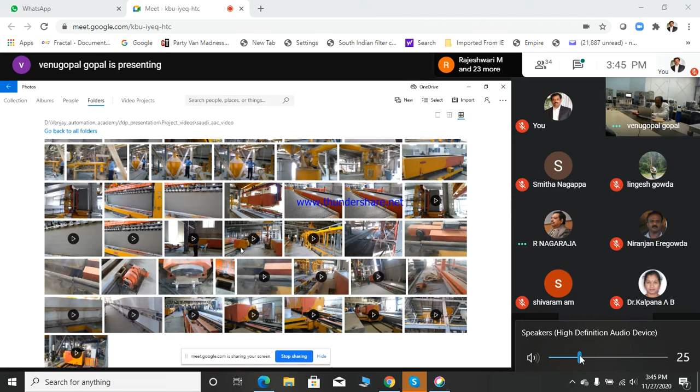I'm not going to bore you with any PPTs, I don't like to do that. Mine is a live demonstration. It's all real-time applications, so we don't deal with any theories. It's all practicals. So what do we produce?

This is a plant where we produce what we call AAC, aerated autoclave. These are all actually bricks used for building. Only in our country do we use cement blocks for all our buildings, whereas throughout the world, people use only this type of block.

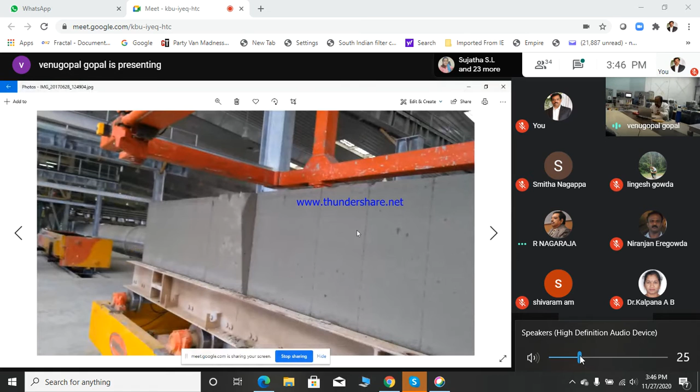This is called AAC. What does AAC mean? Aerated autoclave. Here we use fly ash. After burning the coal in the power plant, a huge amount of ash is left, that is called fly ash. We utilize this fly ash and make a brick for construction of buildings.

This is one area, over the last 4 or 5 years, where we have done a lot of work. I'll take about 5-10 minutes to go through this, and what consultancy means in this will become very clear, that's the reason I'm saying this.

So what we do, this is again SCADA. I showed you one SCADA system, this is SCADA for that particular plant, for the Saudi Arabian plant. I will try to reduce the volume because there is some noise coming through.

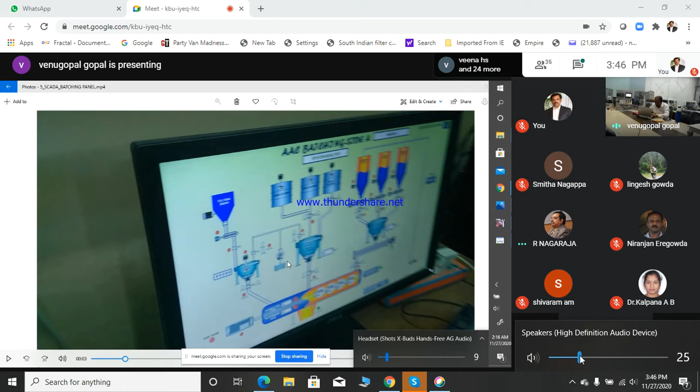We mix them into a slurry. This is a tank in which the slurry is stored. Now these are all powder, cement, silo, gypsum.

There is what is called a screw conveyor. I think if there are mechanical faculty here, they will probably connect with this. What is a screw conveyor? A screw is a conveyor which looks like a screw, but it's best for conveying powder. When you turn the screw, the powder slowly falls, so you get very fine control of the powder. This is called a screw conveyor.

These are all pumps for liquid use. This is a weigh hopper, showing the weight of the liquid. So we measure the liquid, we measure the powder, then we measure the aluminium, and mix all of them in a mixer. This is how this plant produces that slurry.

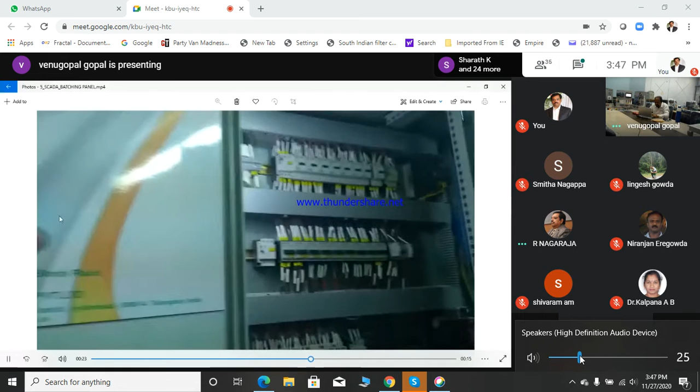This is the panel, these are all our equipment supplied by us. All this is manufactured in our factory, we manufacture these types of panels. These are our customers who are machine builders. So we produce all this in our factory and export it to Saudi Arabia and different parts of the world.

So what exactly do we do? See, this is the tank, it's such a huge tank, with all this slurry pumped, and all these are pumping.

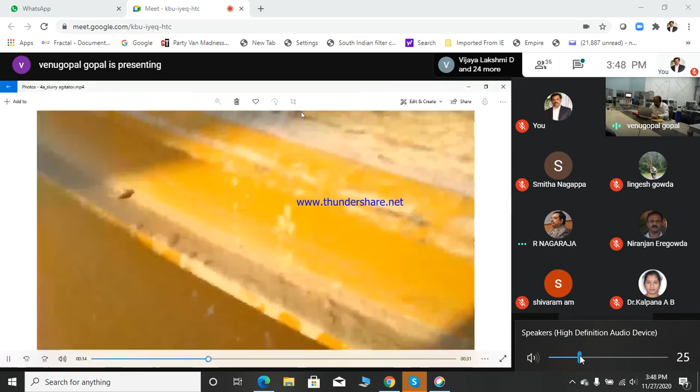This is a place called Jubail, in Saudi Arabia. It's one of the very big industrial cities in Saudi Arabia, almost 100 kilometers long. Can you believe 100 kilometers? You will see only industry.

So we make a slurry out of this, then we add them, it's like this. Now I will explain the process a little bit, because this is a very long process. But what is required first is process knowledge.

Be successful in becoming a consultant. That's why I'm saying we are only an automation supplier, but however, we are involved right from the beginning. Once I finish this, I'll come back to the consultancy portion.

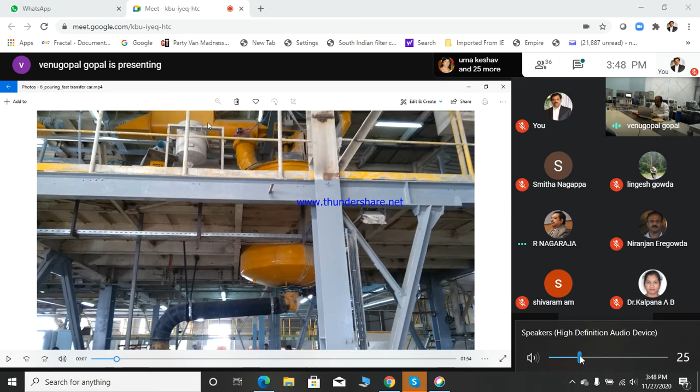We have a screw conveyor here, that's what you saw on the SCADA, this is the actual screw. Powder comes from this circuit, liquid comes from this circuit, they all get mixed in a mixer. This is a mold, because we have to cast the liquid into a mold.

So what do you see here? There is a controller in this, these are all intelligent controllers. There's a controller inside this box, and one more controller on top, and they talk to each other wirelessly. There is no wire connectivity because this is a moving car.

Once we pour all the liquid, it starts moving. We can't put wire to this, mainly because it's very dirty, this is a very strong bonding cement, so it will damage all your wires.

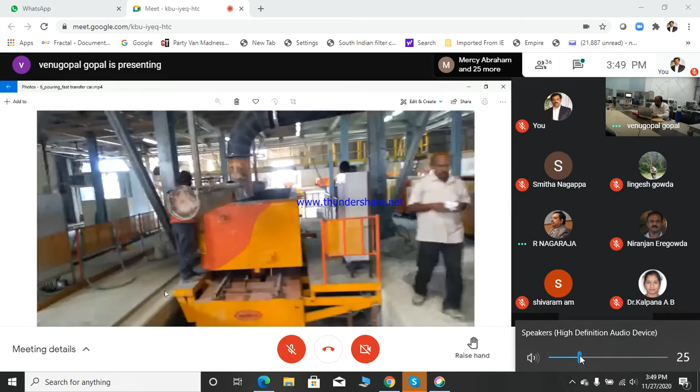How does it get power? There is power inside this. Inside this area, there is what is called a bus bar, a shrouded bus bar. So it gets power from inside, but all controls are wireless.

So this mold, once poured, has to be left for 2 hours, undisturbed, because that is where the chemical reaction should take place inside, there is what is called a bubbling activity that should happen inside. So now what is happening? This car, this mold, by the way, ours is a fully mechanized system.

Okay, so whatever automation we do is totally mechanized. So whatever people you saw on the car, they are basically, these two people are fitters.

What we are doing, when this car moves, there should not be any vibration. If it vibrates, then this chemical reaction will collapse. So these fellows are grinders. They just grinded this rail, and now they are taking a ride to see how much vibration there is. Based on that, they grind it again. Otherwise, all this moves automatically by itself.

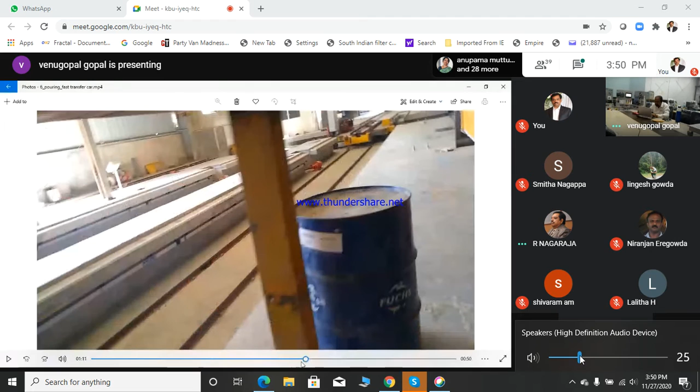So now what will happen? This mold will be transferred onto one more car which is waiting on this side. See, there is one more car waiting here. So this mold comes here and gets transferred onto this car. So what will happen to that mold? This car, again, is a very intelligent car.

Intelligence is built in everywhere. This is called distributed control. The control is not at one centralized place. This car has got its own intelligence, everybody is free to work, but they talk to each other on a wireless system. That's the beauty of this entire plant. You don't see much cables anywhere because they're all on wireless.

So whatever mold this fellow received, he has pushed all here. See, you can see all these molds were pushed one after the other. They pushed here, 1, 2, 3, like that. It has pushed on its own.

Now, after a certain time, based on the temperature and several other factors, this fellow will decide the mold is ready. It is hard now. Whatever liquid was there, it is now set. So now he is pulling this and going to put it into another track.

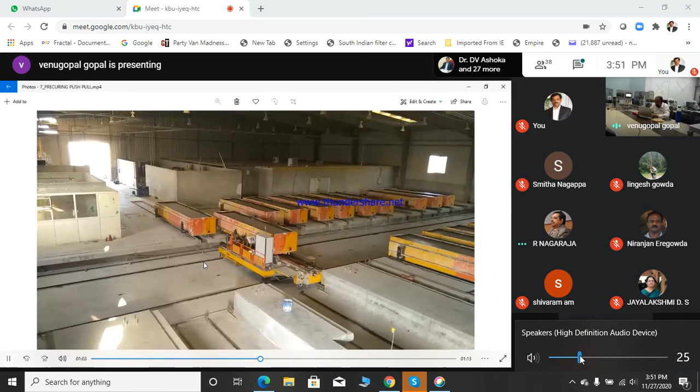Now, the first effort of automation here is, imagine if somebody comes into this line and this car moves at great speed, you will get crushed. So safety becomes the topmost priority. One of the main reasons why you should have thorough process knowledge is because in automation, safety becomes the topmost priority.

So now after this mold is pushed, this will come and push this mold onto this track. I'm going to accelerate a little bit because we hardly have 30-40 minutes to talk, so I'll try to push things a little faster. If there is anything, one more is coming now. By the time you push this, one more will be coming.

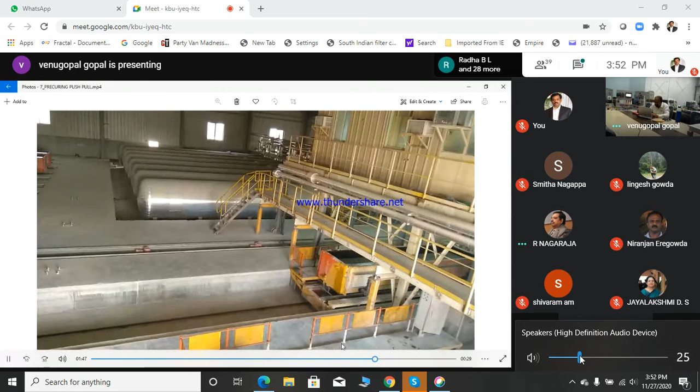This is a steam curing chamber. Whatever you see here is the steam curing chamber. So the whole thing is sequenced that way. No time is wasted. By the time you push one mold, the second mold is ready. That is how automation improves productivity.

Now what is the biggest challenge for us? This whole thing is 8 tons. The weight of this whole thing is 8 tons. 8 tons of material has to come and park here with an accuracy of 100 microns. Imagine, if it comes and crashes onto the wall, what is here is just a wall. So if your control becomes out of control, there is a serious accident. Look at this, it comes so close, it doesn't hit.

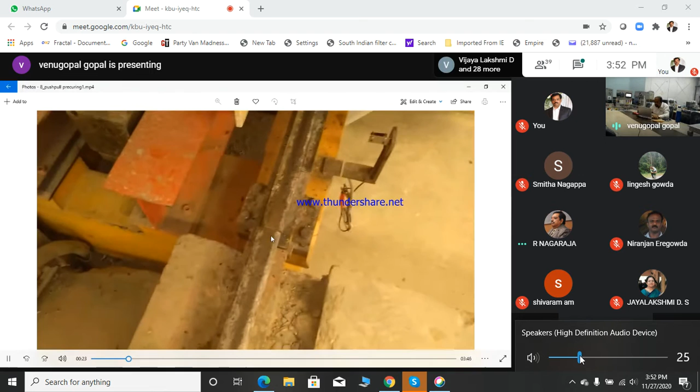Now look at this area, parking accuracy, 100 microns. Look at the parking, so accurate it has to be, because otherwise the mold will not get transferred from this rail to that rail. If it doesn't get transferred, and it falls down, finish. Next 3 days, your production is dead, because you have to cut the rails and do so many things.

Accident means very severe. And imagine one more thing: suppose you write a wrong program in your controller, and when this fellow is halfway, after pushing the mold, it has to return back to push the next mold. Suppose at this stage, if this fellow takes off, what will happen? The mold is half out, half inside. Then you have a serious problem. So these are all what we call interlocks.

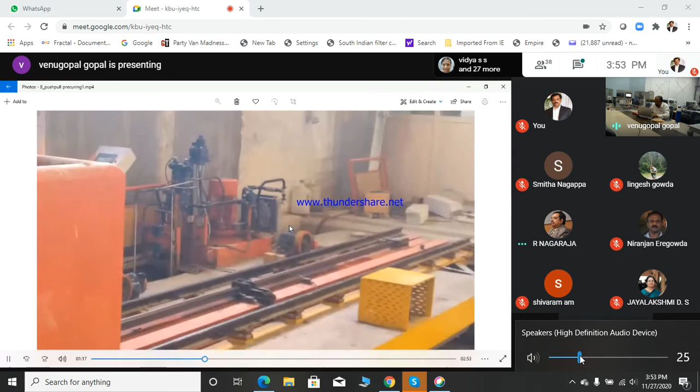Very, very essential when we write the program. Okay, and what you see here on the back side is hydraulics. See, one of the great advantages: I am an electrical engineer basically, but I gave a talk at NIT Calicut on hydraulics for 3 days. Though I am not a mechanical engineer, we know about hydraulics applications, how to size a pump, how to size the cylinders. All these pushers are hydraulic power packs.

This is a hydraulic power pack which is actually pushing this mold inside. So once this is completely out, this will take off. That means we guide it by another sensor. See, now this knows comfortably that it is out. That means there is one more sensor here, somewhere here. If that sensor is on, that means the mold is comfortably outside. So all these interlocks are very, very essential.

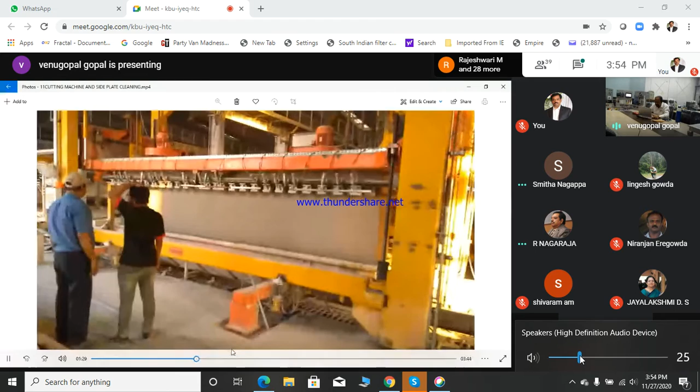See, this we are cutting by wire. Okay, then we tilt it. A lot of processes will happen on this. Let us not go through it completely, because this video itself will take at least 1 hour to understand every process. So many types of cranes are there, so many types of cars are there. All are continuously working one after the other without any accident for the last 2 years, producing 1,600 cubic meters. It's a huge plant actually.

Okay, see, top base cutting. Now this is waiting because this crane has to come this side. Unless this crane comes this side, this cannot go further. So as soon as this comes back, this will go for further parts. Like this, different types of interlocks. Then what will happen after you cut this cake? It gets bonded. This is another very tricky process.

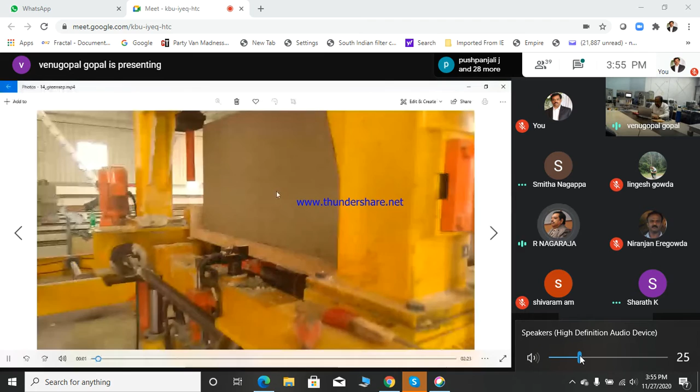Now these are all things after cutting by a wire, because this is a very heavy wet cake. It is really wet. If you just press it, it will break. At this stage, it is very heavy. It will bond itself, that means the pieces get attached to one another, and then removal becomes difficult. So we do another process called green separation, where we separate each block separately at the green stage itself. I'll show you here. You can come here.

See here. This is all using servo drives, hydraulics, pneumatics. See, now this is separated. We separate each block. Now it is very wet actually. If you touch it, it will break. But we have to handle it so smoothly. We use servo drives, ball screws, all these mechanisms, because we want to reduce the impulse torque.

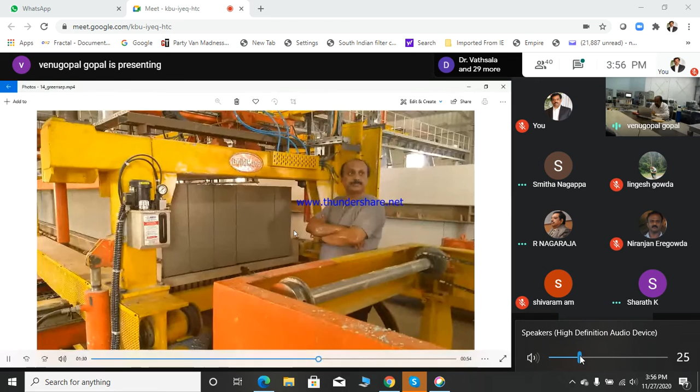So how will a ball screw reduce impulse torque? This is a subject of mechanical engineering. But automation fellows should know, because if you go for some vibrating system like hydraulics, it will generate more vibration. It may not be as smooth as a ball screw. So which system to use where is very important knowledge that a consultant should have.

Okay, so now see, this is already bonded. Now I am separating this. Automatically we are separating this. So this is a very tricky machine actually. Initially we broke so many blocks. After 2-3 days of trial, we could finally succeed in separating the blocks at the green stage.

Because after steam curing, it becomes very hard. You can't touch it, it will be so hard. This is a steam cured block. This is a green block. This is green, this is already dry. So like this, there will be so many processes in this tilting, with a hydraulic tilting table and all that. Let me not go through every detail of this. Just for sake of it, see now, to park this.

Why am I telling you we have to work like a consultant? This parking, how we got this order: we quoted against a multinational company like Siemens, a very big company. Against them, our company, Venja Automation, is unknown. Nobody knows it. It is a very small company. Now, what happened? Before this order was being discussed, we approached the customer. The customer was not willing. He said, no, I deal only with very big companies.

They don't go to small companies like Venja Automation; we are a very small company. So it was almost a cakewalk order for Siemens. He had already decided to give this order to Siemens. Because previously about 5 crores worth of orders had been given to Siemens, and when the first plant was getting installed, they failed in this application.

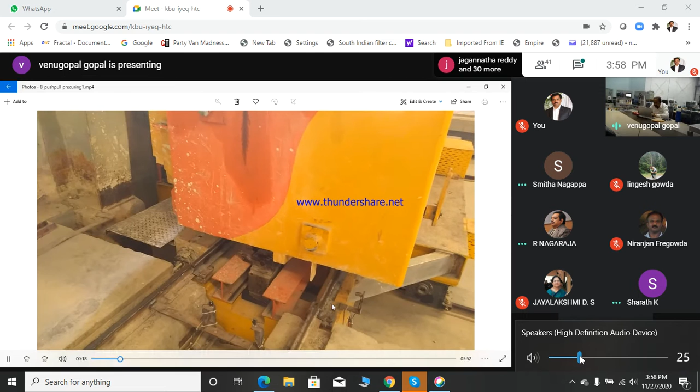Siemens literally failed. Some young engineer went, he had no experience. So they failed in this application because they were unable to do this proper alignment. Sometimes it stops here, sometimes it stops there. Why did they fail? Because they used an encoder on this wheel. So whenever this wheel rotates, that encoder will make a number of pulses.

Okay, I use a lot of these systems for training and teaching students. So see, I have this encoder with me. We call this an encoder, whatever I am having in my hand. We use plenty of encoders. That means once you want to know the encoder, again instrumentation comes into the picture. So you should have knowledge of instrumentation, electrical engineering, electronics, because of that acceleration, deceleration, that slow control. Again, you need knowledge of drives and motors. So you need multidisciplinary knowledge to be a consultant.

Anyway, let me finish that story. So this encoder they had used. Now what is the drawback? The encoder is an excellent device, there is no doubt. But there is a drawback. What will happen if you put an encoder on the wheel? Now this is a mechanical device. When the wheel rotates, the car will not move exactly pi times d of the wheel. If the wheel diameter is 300 mm, we expect one rotation to be pi times d. That means this car should have moved about 900 mm.

But sometimes it will move by 890, sometimes by 910, sometimes by 850. That is because there is a slip, a metal slipping. So due to that your encoder becomes erroneous. So if you try to use such a product, you fail miserably. So then this customer said, what will you do? Will you go for this? Will you go for that? And I said, if you are going for an encoder, then you will miserably fail.

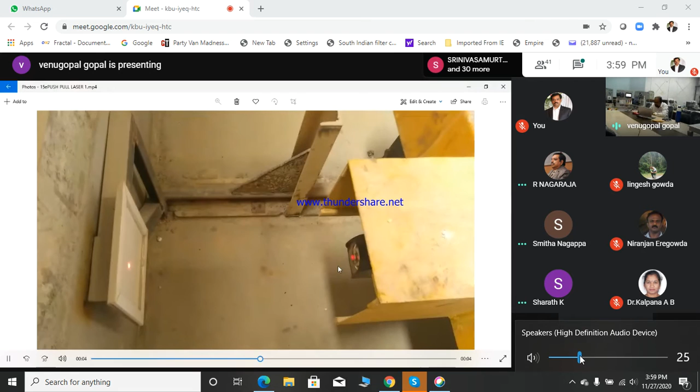And then what is the next solution? Then I gave him a solution. We have to go for an external encoder. See, this is a sensor, we use a laser. This laser sensor is fitted to the car. Now this will put a beam on the wall. Now when this moves, the laser beam will elongate. Now this has no slip because there is no metal to metal slip, because this is directly giving me the distance between this wall and this car. I'm getting direct distance in 32-bit format.

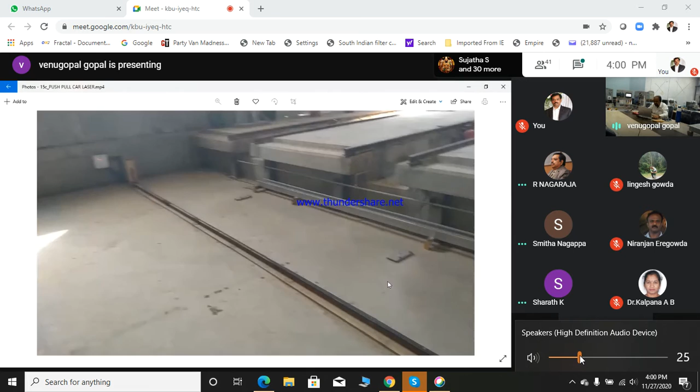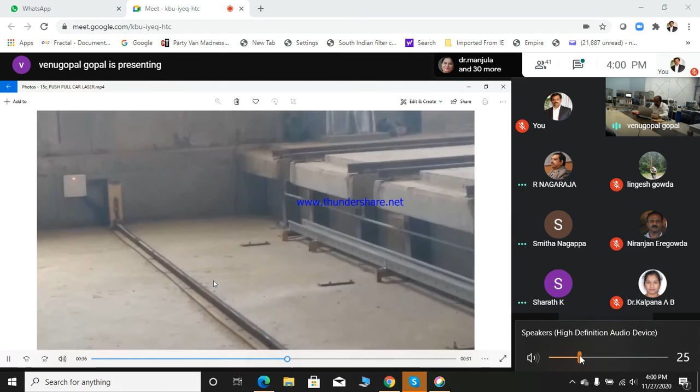What is 32-bit format? Again, electronics engineering comes into the picture. You must understand binary language for electronics engineering. 32-bit is a huge number. This entire length is 55 meters, and I get a number worth some 55 crore. That means every meter becomes 1 crore. That means my accuracy will be better than 1 micron. 1 micron is only a thousandth of a mm. So once I get a sensor which gives me exact distance, then I write a program: you slow down, you stop, all this. Now this is exactly the knowledge of consulting.

So this is how I got the order. The moment I described to them that if you use an encoder you are going to fail miserably, he said, yes, I'm very glad that before using the encoder, you told me such a thing is not going to work, because we were fools, we gave 4 orders to them and all 4 orders are in trouble now. So can you please help us? Then we got this order. It is a longer story than this. Let us stop at this stage.

Because for the automation to be successful, we should have a shorter path. You cannot have your mold move all around the globe and then come here. By the time it comes here, we would have lost so much time. Because we have to produce 1200 cubic meters. 1200 cubic meters means every 4 minutes we have to catch one mold. If I have to take one mold every 4 minutes, the path has to be shorter. If you make that mold move all the way, you lose time. Then your automation will not be successful, and whatever crores of rupees you invest becomes waste.

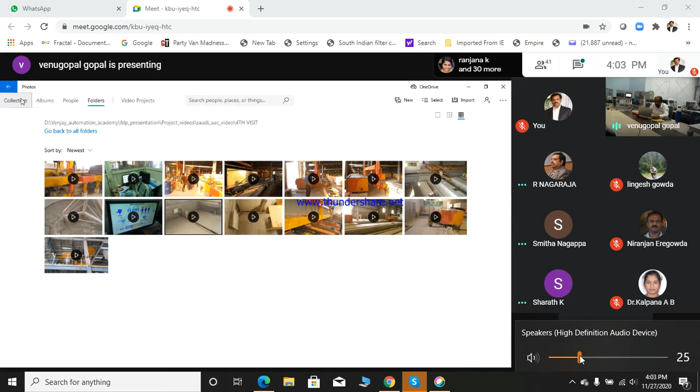Now, instead of block making, we also do one more type of project. Here again I am a consultant, supplier, everything. Consultant free of charge, because they expect us to do every consultancy free, because they are giving us the order. But for me also it's good, because I am assured of the order, because nobody knows the client better than me. So instead of believing somebody who doesn't know, the customer will be more happy to give me the order, because I am involved right from the beginning.

What is this? This is a different type of plant. Here we built 1,100 houses in 8 months. Can you believe? In 8 months we built 1,100, in 7 towers. How do we do it? If you take block by block and try to construct this wall, it will take ages. Like your college buildings, they are all built with those blocks. It would have taken 4-5 years to construct a building like this. What do we do? We make the wall itself in the factory. Every 15 minutes we cast one wall.

Okay. So how does it work? This is again another different thing. I will not spend much time, but I'll just give a brief idea. What you see here in blue color is the plotter. After you make the drawing of the building, we allot a number to each wall. For example, you take this wall. This is wall number 1. This is wall number 2.

What is the difference between this wall and this wall? Here there is one window. Here there is one big door, a balcony door. This side wall has nothing. It's a straight plain wall with no window, nothing. Like that, different walls are given numbers. There are 11 floors in this building, and there are 7 towers. So 77 walls will be made, not at the same time. So based on the height of the wall, this is a moving circulation system.

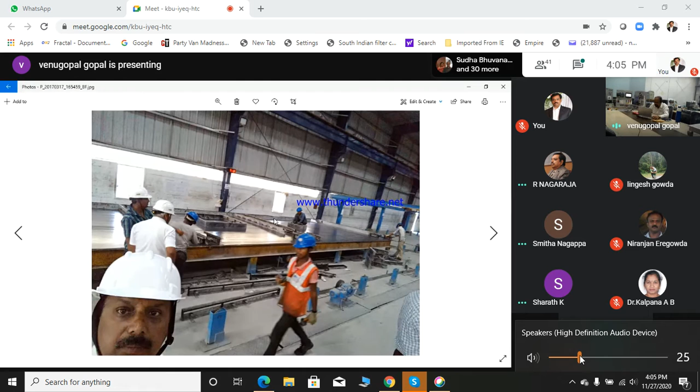This metal that you are seeing moves from here to here. It's on rollers. You can see here, they're all on rollers. So it moves from there to here. Now this will plot what is the size of the wall. Suppose I want a 10 feet wall, it will only plot 10 feet. Suppose I want a 15 feet wall, it will plot 15 feet.

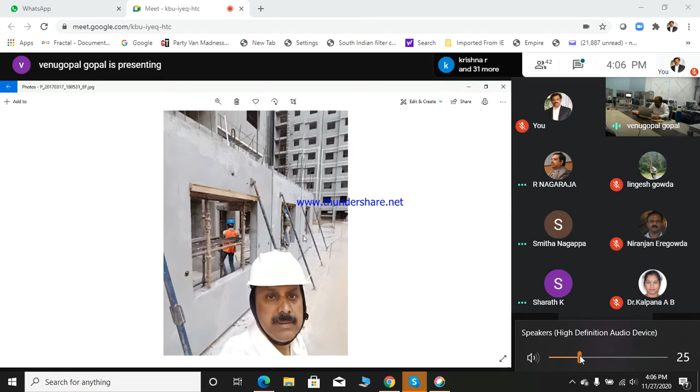And what is this opening? There are windows, doors, all those openings have been filled up. Then what we do? We do what is called cage making. So these steel bars are inserted, then all these electrical pipelines, plumbing pipelines, they're all drawn before itself. See, one great thing is all are done in the factory itself. This plumbing line, everything done in the factory. This is a factory, so nothing is done on the site.

So after all these lines are put, this crane will come, one more crane which is on the other side will come and pour the concrete. After pouring the concrete, we vibrate it. Look at the finish of this wall, fully finished. That means no plastering required. Just right away, you can paint this wall. It is brought to that shape. Imagine all this happens in 15 minutes. Every 15 minutes we produce one wall.

Then this crane, where is it? Okay, this crane, this is a very big crane. See, this is a big challenge. Lifting so many tons of material up, then pushing it into the curing chamber. So that wall will be cured for about 8 hours in steam. So every 15 minutes you put one in and you take out one. That's how you get one wall every 15 minutes.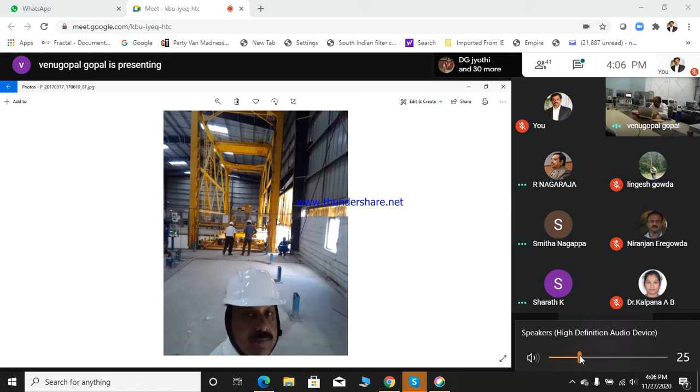Then these walls are transported by lorry to the site wherever they are getting erected. It is mounted on the lorry by a gantry crane. This is a gantry crane which lifts this and puts it. Then it is erected by a tower crane. You would have seen tower cranes on top of many buildings. This tower crane will simply lift that wall and place it here. Then they put a sealant, gum. Very simple. So in about 8 months, your building is completely ready. Look at this. This is a tower crane lifting a wall and just placing it.

So these are very new construction methods. We also do a lot of work in this field. Anyway, I will not spend much time on this, because I am trying to show you only construction type of automation. We also do automation. This is another very big field. Just now Madam was mentioning, Pulau Ubin is an island. So we have done a lot of work on this island in Singapore.

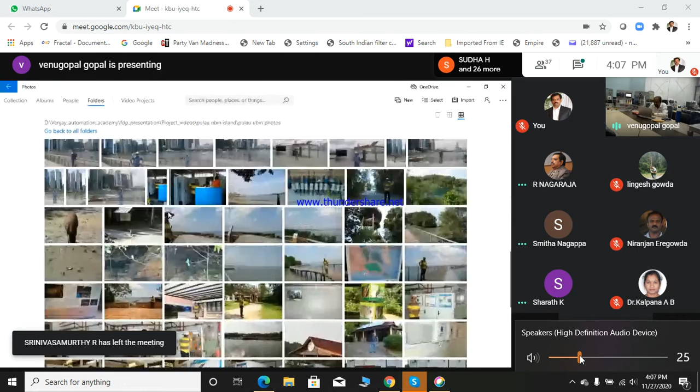Basically, this is a hybrid generator. Here we use diesel engine, wind and solar. Of course, wind is not there now because a lot of birds migrate to this island. They don't want any bird to die because of the wind blades. So only these two are there. What exactly is this project? Another type of automation, which needs a very thorough knowledge of electrical engineering. This is called a doubly-fed induction generator.

What exactly do we do? This diesel engine runs at different speeds to save diesel. This island is a tourist island. A lot of people come to this island. So this is actually our generating station. On the top we have put the solar panels. Now in the morning, sunshine is very bright. At that time, a lot of energy is generated, but no taker, because nobody has come to the island yet. We have to come by ship, ferry and all that. It will take time to come to the island.

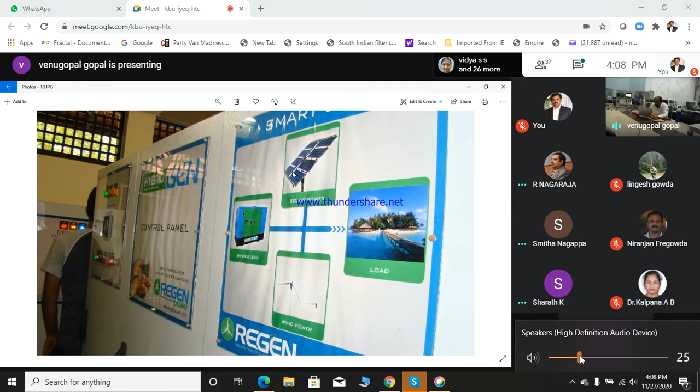So at 9 o'clock, there is bright sunshine. Nobody is there. Then what will our system do? Our system will pump the water, then start the ice making. All that energy utilization we do from this panel. Then we generate 3.2 megawatts. Can you believe we generate 3.2 megawatts?

In the afternoon, when all the people come to restaurants, air conditioners and so many heavy loads come on the system. At that time, we switch on the diesel engine and run it at different speeds. The diesel engine itself is specially made to run at different speeds, so that whatever is the shortfall from the renewable energy will be compensated by this diesel engine.

So previously, before installing this system, all the hotels had only generators. They had their own captive generators. Now they were all removed, and now we are giving power from our system, which has got all these PLC controls and all the things. So it's a very, very big project actually.

So many types of projects we do. We do foundry automation. I don't think I will have time to go through each one of them. We are already at 4:10. Here also a lot of knowledge is required to do a foundry automation. I'll just give you a simple example. See, while we were commissioning this foundry, how it works?

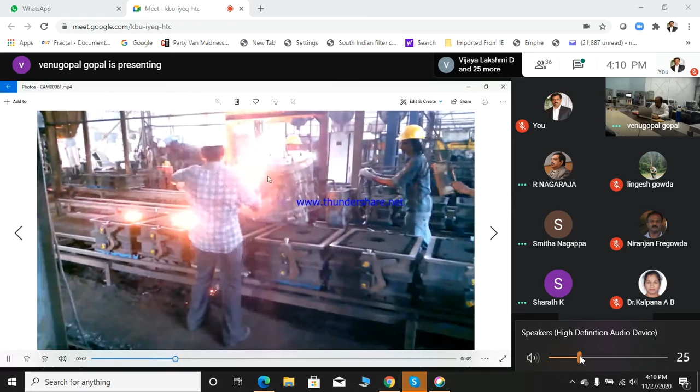Basically, you pour hot metal from a furnace, from an arc furnace. This is the arc furnace. You melt all this metal, all the scrap metal, some other metal. They are all added together in this arc furnace. Now from this ladle, the hot metal is tapped and it will be poured onto the mold. You can see here on this sand mold, a small hole is there. So you pour this hot metal, then you get whatever shape you want to get.

Now what exactly does this customer do? This plant is in Trichy. They produce balls, round balls for cement plants. In a cement plant, when you want to powder, even in the power plant, when you get coal, this coal will be lumps. Somebody has to powder it. Only then will it burn very well.

For powdering, 15 tons to 20 tons an hour of coal is required in a power plant. Who will sit and start powdering this? So this will be done by the ball mill. That ball mill needs steel balls, which, when you rotate the ball mill, will hammer and make a powder. So this company produces the steel balls. Look at how we have placed our panel, and what type of environment we work in. Anyway, that's a different story.

Now I want to show you a very interesting part of this. The sand plant is one area in a foundry where there will be many belt conveyors. A conveyor will carry the sand from 1 to 2 and so on. Then there will be a bucket elevator which will lift it vertically, then it falls into a silo. Like that, so many processes. One more bucket elevator, one more belt conveyor. These belt conveyors are underground, unattended.

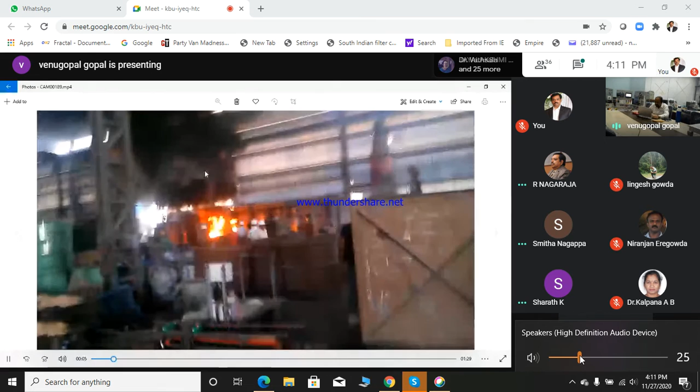Some things happen very easily. One day it caught fire. The belt conveyor caught fire. So how will a belt conveyor catch fire? What is the modality of that?

Just very recently we concluded a one-month internship for 190 students. I showed them all these things and explained what this batching plant is and all that. Anyway, let us come back to this. This is a belt conveyor. This is a batching plant with load cell, pneumatics. This is a pneumatic cylinder. We teach so many things. Knowledge of pneumatics, everything is required to be successful in automation.

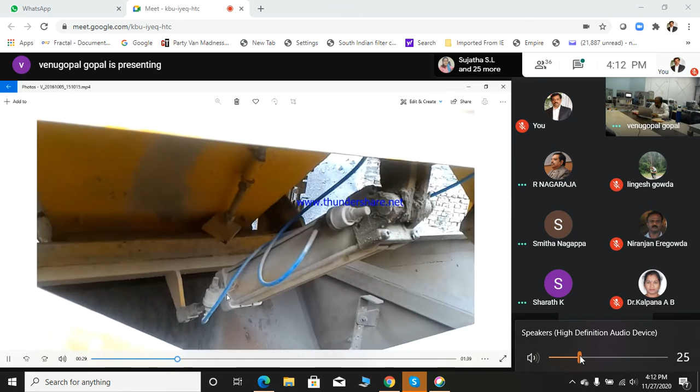Okay, now let us get back. This is a belt conveyor. This belt conveyor is hung by a load cell. In this plant, see, this is a load cell. If you see here, you can see an S-type load cell. So this gate will open and allow the material to fall until we achieve the weight. Once the weight is achieved, it will close automatically. How are you measuring the weight? You are measuring the weight by a load cell.

So see now, this is the S-type load cell. Can you see a belt here? Not small, but in a small place. This belt is hung by a load cell. The belt is actually hanging. If the material falls onto the belt, this will get a force. Based on that force, you will be measuring the weight.

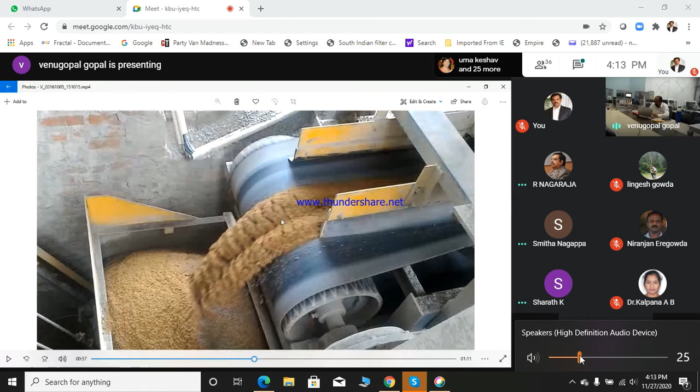Now, what happens? On this sand plant, this belt many times gets stuck. If the material becomes overloaded, suppose instead of small lumps of sand falling, the material will get choked. At that time, these rollers will be rotating, but the belt will be stuck, not moving. At that time, due to friction, it will catch fire. So what to do?

For these idle rollers, we put one sensor called a zero speed switch. Whenever the belt is rotating, that roller will be attached to the belt, pressed against it. As the belt moves, the roller also rotates. If the roller rotates, the pulse will come first, and one sensor will turn on and off continuously.

As long as we get that pulse on and off, that means the belt is physically moving, so we keep quiet. The moment we don't get that pulse, it means the belt is stuck. Immediately we stop this belt, and not only this belt but all the preceding belts. Suppose this is BC5, belt conveyor 5, then we have to stop 4, 3, 2, 1. All of them have to be stopped because this one is already choked, and you should not push further material.

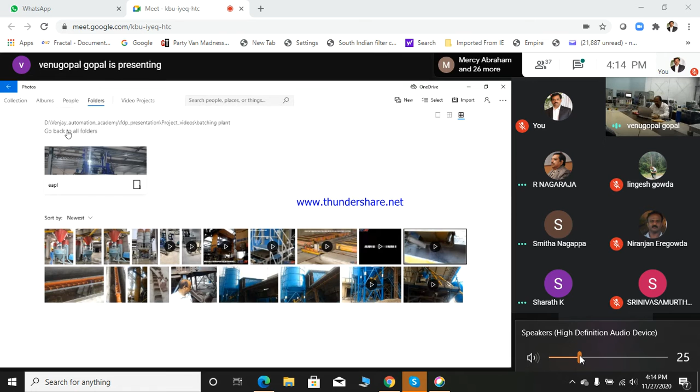So these are all different process knowledge required if you are working in foundry, if you are working in power plants. Lots of varieties of knowledge are required, so you cannot become a consultant in every field. I'll tell you what exactly the consultancies you can do as a college.

So anyway, now we try to impart a lot of this knowledge to students. These are all students who come to our factory, many times, lots of students. This is what we manufacture in our factory - these are all air circuit breaker panels. This one is for Kesoram Cement.

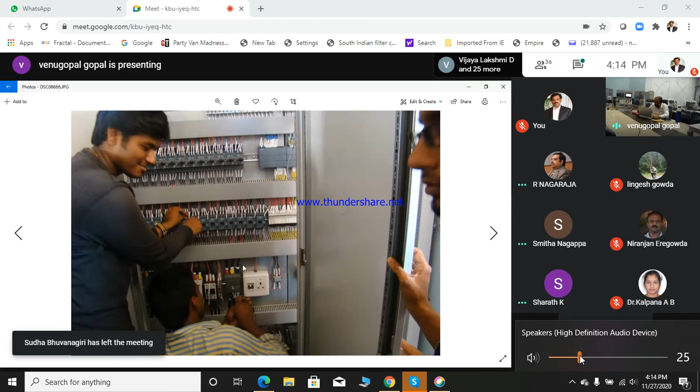Whenever they come, whatever is going on in the factory, we try to show them, we try to make them learn. This knowledge is required for them because they should come with system knowledge - knowledge of each of these components we use, like MPCB, motor protection circuit breakers. This is a PLC, these are MPCBs, contactors, a lot of these devices which we use for protection.

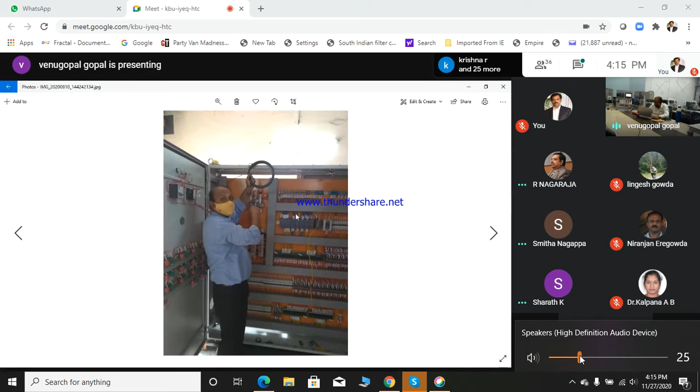Then electronics, instrumentation, computer science - I will come to computer science also.

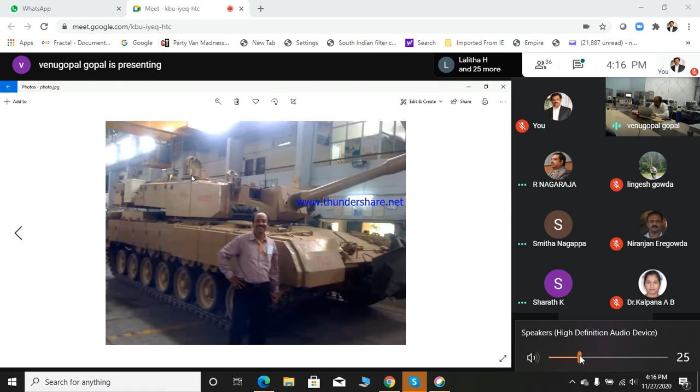We did some work for the Arjun battle tank. This is the main gun, and there will be one more gun called the auxiliary gun. One of the projects we did was for missiles - these are all the different missiles that are kept in the bin, and we have to find out which missile is in which bin.

After in warfare, what happens is they remove the missile and keep firing, so what is left in the bin will not be known to them. So we have to use a very special sensor to find out what it is. How do you identify missile 1 from missile 2? Only the tip - only from the tip can you identify it, because the backside all missiles look the same. Heights are different, bases are different, radiuses are different.

So we use a very special ultrasonic sensor because if you try to use a laser sensor or any other type of sensor, that may develop local heat. So I use this type of sensor - let me grab this here. This is the sensor which we use there. It uses sound waves, produces sound waves and gets a reflection. Based on that, we measure the diameter and the slope. For making the points, when this is pushed, we measure here, and here.

Now, between the two coordinates, we calculate delta x and delta y. We know what is y and what is x. Based on that, we calculate the radius. So whatever analytical geometry I learned long back, all that we can use.

That's one part, but a very big part which I will try to show you now is why a consultancy job is not easy. You need a lot of things. Whatever projects I am trying to show, it is almost impossible for somebody to become a consultant unless you have a minimum 20-25 years of working experience in this field. Otherwise, this will be a very difficult field to work in.

But anyway, let me continue a little more on this. One minute, where were we? Okay, here. So there is one more project we did, which was for a gun.

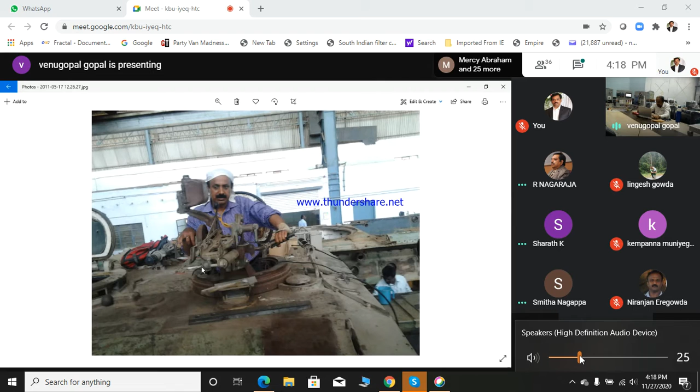This was before the advent of the AD gun and all that. So when a man comes out, opens the cap of the gun or tank and comes out, he's gone - now susceptible to all types of attack from the air. They will simply drop a missile inside and everything gets destroyed in no time. So what is it that we have to do?

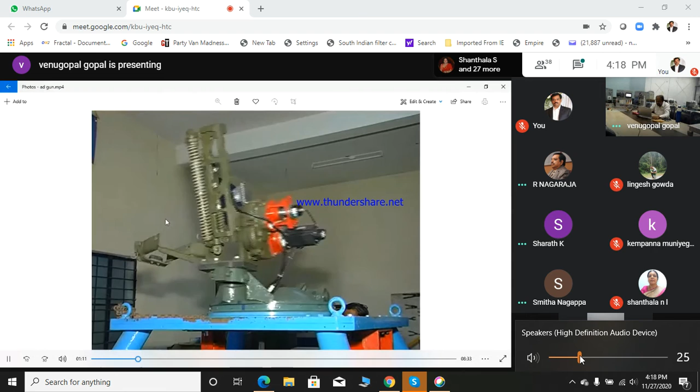We have to use special motors - these are all BLDC motors. Why brushless? There's different EMI, EMC complexities, so many things. What's very important - look at this gun. It stops instantaneously at such great speed, 45 degrees per second. Presently it can run from 0 to 45 degrees per second and stop instantly. That means no hunting on the gun, no hunting on this motor. To do this itself, you have to write a very special algorithm.

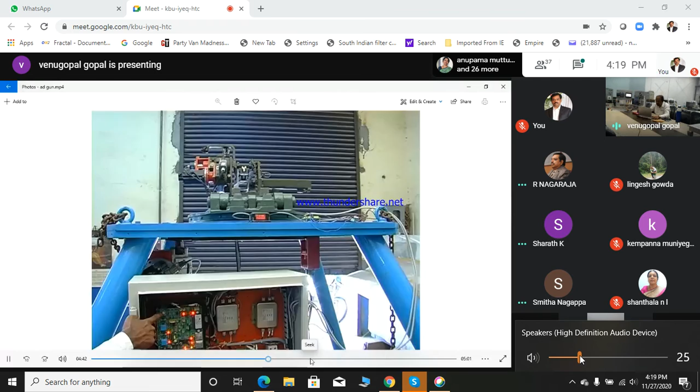Okay, now anyway, I will go back - there are a lot of things on this. This is a 45 minute video, so I don't want to emphasize it too much.

What is very important - these platforms are very immediate. When this gun and the tank, because in warfare you don't know where tanks are driven, so when it enters a tank pit, what will happen to your gun? You are going to shoot an aircraft, and instead of shooting a Pakistani aircraft, you will end up shooting an Indian aircraft.

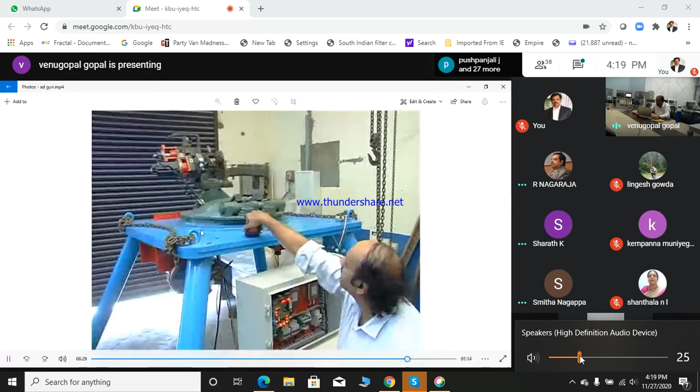You have to measure the disturbance immediately. Now this is one very big story - we took almost 6-7 months to develop this, because the system has to measure how much disturbance, how many degrees angle, what is the magnitude - all the information needs to be captured.

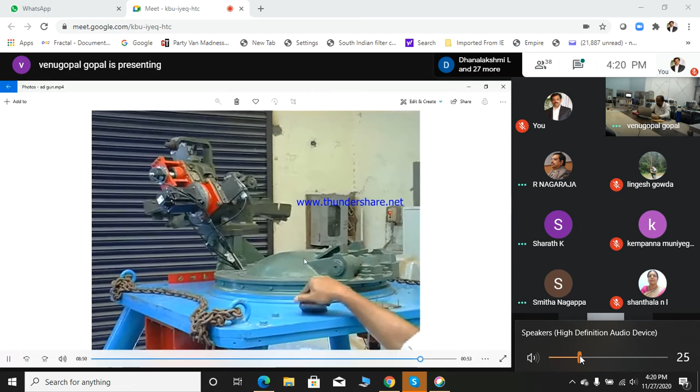But quickly - you should not let anything remain constant in this. In the initial stage, when we did this project, it used to take so much time to come back and correct. Because if you don't correct it quickly, there is a lot of escape for error. So that is where the knowledge of control systems became very useful.

When I was a student in electrical engineering, control systems was one of the, what we call, very difficult subjects to learn and understand. I never understood anything - whatever Bode plot, root locus, whatever we wrote, everything was imaginary. And what is the stability of the control system? We wrote something, some book was there, read it, some questions would come, and we'd write the exam and pass.

Now, after so many years - this project was done in 2010 - after 20 years I had to relook at control systems, because I had to understand how to do mathematical modeling, then how to use these plots to stabilize the system within say 15 milliseconds. If you don't stabilize the system in 15 milliseconds, your gun will never control properly, because we had used motors with 180 millisecond response time, which needed to be made much shorter. So by applying all these calculations, mathematical modeling, Fourier series transformation - all the things I learned in the final year of my engineering - all that became useful to me.

Because the biggest drawback of our curriculum is that whatever we study, we don't know where to apply it. Maybe at that time I was very afraid to ask this question to any of my professors.

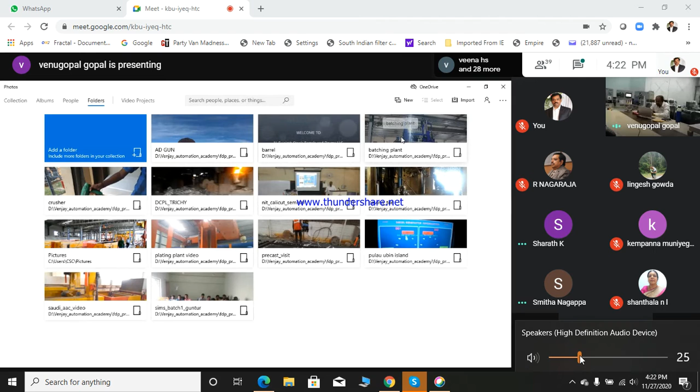We do, anyway, I just don't want to get into further videos. Okay, maybe this one may be required. This is again for the Dubai project. We do a lot of work in Middle East. Barrels, we produce this type of barrels. I use this in my talks very regularly, because when I talk to students, especially the 7th semester students,

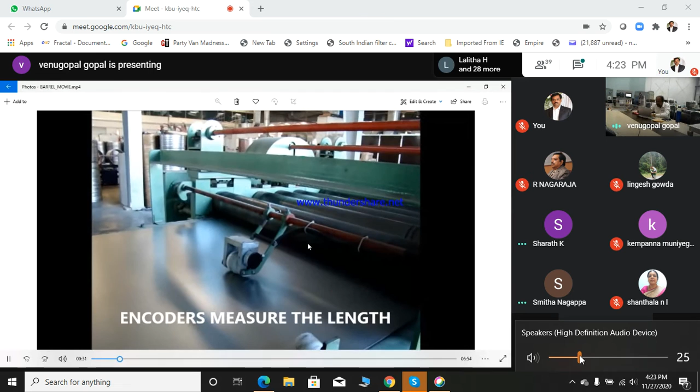Here what will happen, before we make these drums, we cut the steel, these are all steel drums. We cut the steel sheets into perfect length. Now we use encoder here for measurement. This is perfect, to measure the length. As the sheet is going, a wheel will rotate and an encoder coupled to that will measure. And I will get accuracy of 1 millimeter or something. I will be able to measure, then cut the sheets and all that.

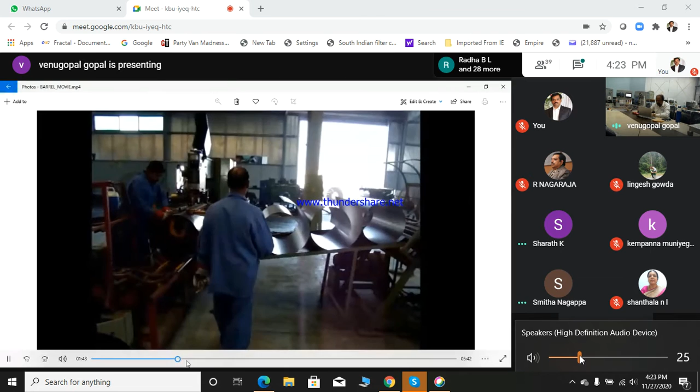Then we discuss the hydraulic system, all these hydraulic machines. See, one of the biggest drawbacks is when students come to see a plant, even mechanical engineers or electrical engineers, they would not have seen a valve, a proportional control valve used in hydraulics. Because now hydraulics can be made to work like a motor by using a proportional control valve, by controlling the flow. So these are the tubes in which oil will come.

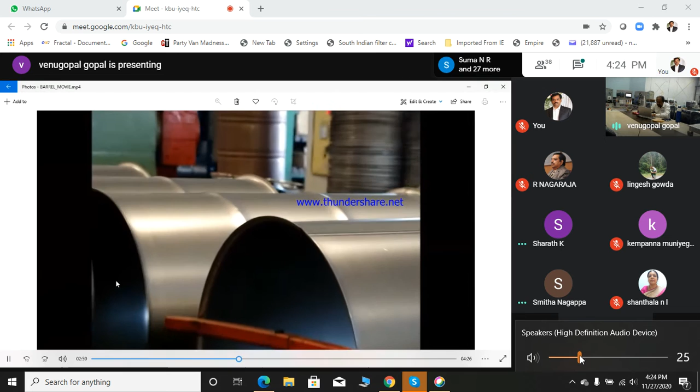Okay, so that oil will push the cylinder, this column will be pushed forward, reverse. So this is a plating, that means you see the edge. The edge will be bent by this machine. Then I will just move further. You see this type of aberrations on the drums, they are made by these hydraulic cylinders. So this cylinder will go inside, as you can see here, this will go inside, expand. So these grooves will expand and collapse.

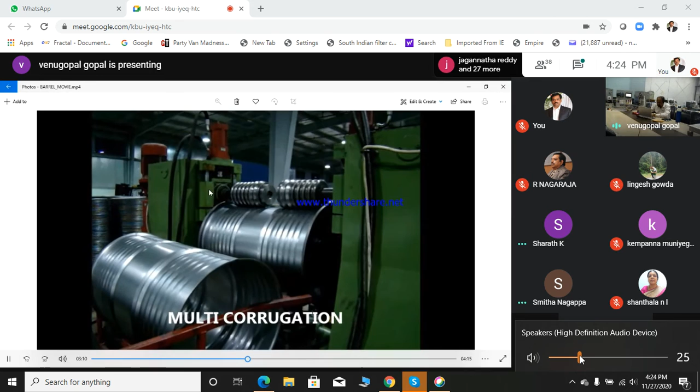So when it expands, it will make an impression like this. Okay, so this is a beading. Then you would have seen a corrugation. See now this type of operation is done by 2 tools on the top. Again, this hydraulic, you can see this cylinder. This cylinder is pressing it now, pressing the tool. Once it makes one rotation, this is moved up. So like the different types of operations we do.

Hydraulics. Knowledge of hydraulics is very much essential when you want to do a project like this. So at that time you can't say, sir, I'm an electrical fellow, I don't know hydraulics, because then I will not get the order. Whereas you can afford to say that, but we can't. So we should have that knowledge. Otherwise somebody will get the order who has the knowledge. That's it, very simple. For us, it's a survival. It is not that we would like to be expert in everything. It is not possible, but we should have a basic knowledge of the system.

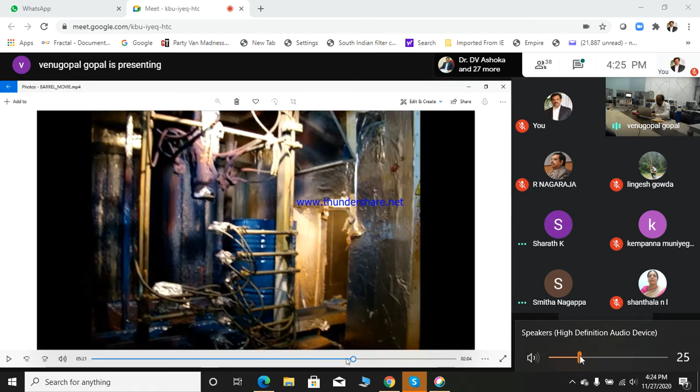So this is again another interesting story. This paint booth, see, there are so many types of colors that are used for this paint. This is called Fujairah steel barrels. If you see here, so many colors. This is red, green, blue, dark blue, light blue. So many types of colors are there in the barrel.

Now, what will happen? What used to happen? In our original system, we had given a recipe management. We had given a simple button, Sasol, Exxon, Mobil. So you press a button, color for Sasol will be set, because these are all nozzles with so many colors. Which nozzle to fire, we have to decide based on what product we are making.

If you are making for Sasol, then it is all blue. All the things from top to bottom will be blue. If it is something different... Now, most of the workers who are operating on this plant are Bangladeshis, highly uneducated. Even if you write in Urdu or whatever, they cannot understand. They don't know how to read.

So what we did, we took a photo of these things. We have put it in our HMI screen. Now, by looking at the photo, he knows which to produce. Now, the moment he presses that button, this is called recipe management. We write a recipe program where there will be a database. From the database, we pick up the sequence, not only the number of solenoids, but the sequence, which will come after which. All that will be stored into a recipe database.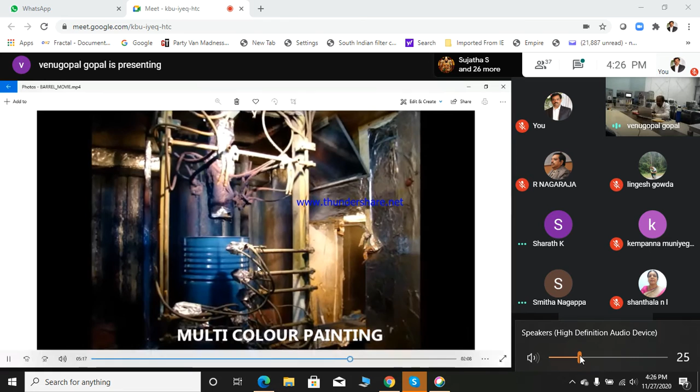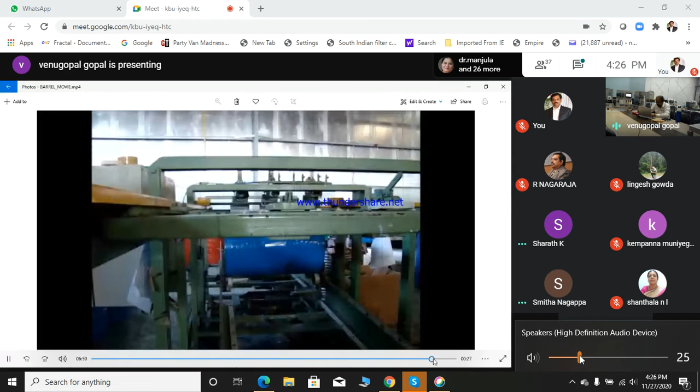So all that I will talk about a little bit. After another 5 minutes, I will go to computer science. We talk of SCADA and other things. So all those things we will talk about a little bit later. So then we do screen printing, lot of types of automation we do. Anyway, I forgot to tell you one very important part of automation, which normally we use in our talks. Let me go back to this.

Okay, so maybe some of you might have seen this, some of you might have visited. I do not know, but this is for your knowledge. See, the concept of automation started from where? It was started from automotive plants, car manufacturing. So they started the entire concept of automation very long back, like 1920, 1930, 40, in those areas. So almost 100 years, the automation was there.

But where were computers then? Where is SCADA? Where are sensors? Where is the microcontroller? Nothing was there in 1920 or 1940. So this was purely a mechanical automation. You would have seen Charlie Chaplin's movie. So he will run behind a conveyor type of automation. Then came electrical automation.

So electrical automation, I don't have it with me, but I could have shown you maybe some other time, because today's talk is more on what is required for consultancy, so I am trying to go through all these things. So electrical automation was started with all relays, contactors and all that, electrically operated switches. By using that, people used to automate a steel plant.

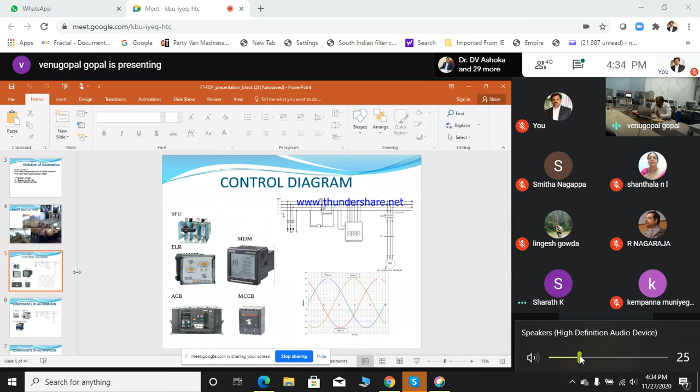That's the reason DC motors are very popular. 30 years back, if I were to do automation, like the videos I showed you, I had to use DC motors only, because changing the speed of an AC motor was not available till 1985. Once power electronics got developed, we got AC drives, we got VFDs, all those things, and that is how AC motors became very popular. So today, 95% of our applications use AC motors.

So these are the different switchgears we use for controlling them. This is what I call system knowledge, product knowledge. These are the different types of starters we use for them. Then we use different types of sensors, knowledge of instrumentation. We spoke about electrical engineering.

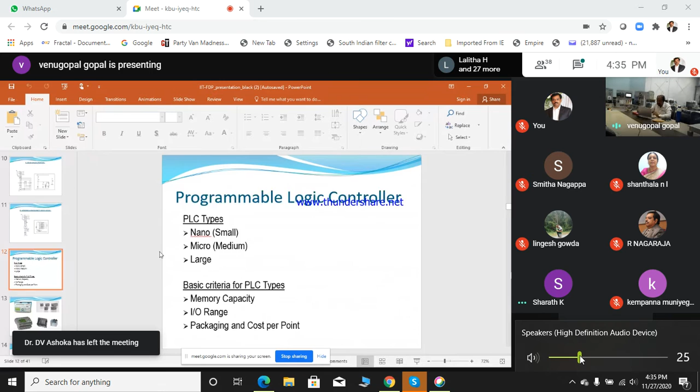Now I didn't say much about mechanical. Some other day we have to go for a ball screw. That is fine. The mechanical decision will be first. Should we go for hydraulic? Should we go for pneumatic? Should we go for motorized control? Then only all the electrical systems will come into picture. Because if you are going to hydraulics, it will be more of another type of thing.

Then instrumentation. What type of sensors should we go for? We could go for laser, ultrasonic. This is RTD, temperature measurement. This is for pressure measurement. Load cell for load, weight measurement. Different types of proximity switches, limit switches. So many types of sensors we use in our project. These are all used for automotive.

Anyway, by the way, I spoke to one of the professors in the college. See, automotive is a very interesting plant, car manufacturing. The nearest car manufacturing for all of us is Toyota in Bidadi. I did a lot of work for Toyota. When I came back from Singapore in 2005, a lot of the weld shop automation was done by us. Later we discontinued for various reasons. Anyway, automotive is a very interesting process, so if you go there, you will see a thing like this.

Say in Bidadi, they make an Innova car every 4 minutes. 4 minutes is the takt time. Many of you may not know that in India, we make cars every 1 minute. Like Maruti, they make one at 40 seconds. I used to work in a plant in Malaysia when I was in Singapore. We did automation of a project where we used to make cars in 30 seconds, flat 30 seconds assembly. So a lot of such knowledge of the process will be required here.

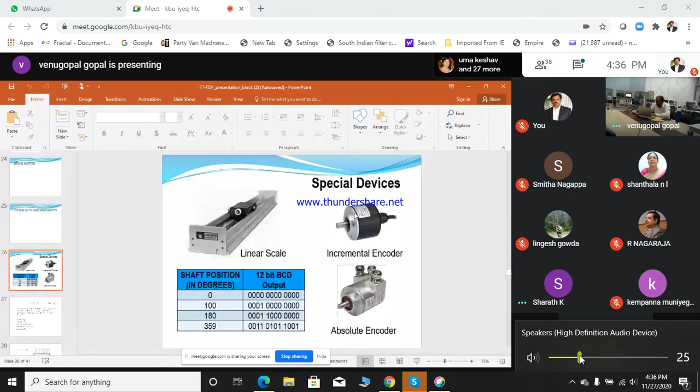Anyway, this is VFD, variable frequency drive, for changing the speed of an AC motor. Then all the other things are programming knowledge. All this knowledge of distributed control, HMI, human machine interface. A lot of this knowledge is required as a process, as a system. Now, what type of networking do we have to go for? Should we go for Profinet? Should we go for serial port?

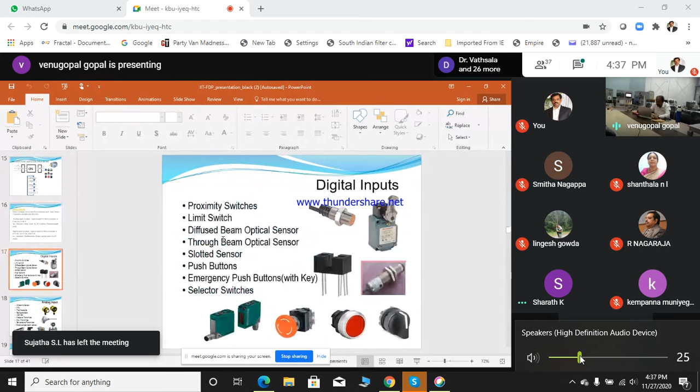Another aspect: the moment I talk about networking, our college professor says electronics. Hey, there is nothing called electronics, there is nothing called mechanical. I want to tell you something here. Suppose this is an ultrasonic sensor, or some temperature measurement. The temperature will come to our controller in the form of current or voltage. Suppose I am using a 0 to 400 degree temperature oven. 0 degrees means 0, 400 degrees means 10 volts. That is how I get this signal to my controller. This is voltage. If it is current, I get 4 to 20 milliampere.

Now, I ask most of the students, do you prefer current or do you prefer voltage? Suppose I have a sensor which gives both, voltage and current. Which one are you going to choose? 99% of students will say, sir, voltage.

All our plants are very huge. You saw the video, no? They are almost 3 acre, 4 acre plants. When you try to bring a wire from such a long distance, there will be a drop if you use voltage. So we use current. In current also, why 4 to 20? Why not 0 to 20? I'll give you an example.

Suppose I am measuring the speed of a motor, using 0 to 20 milliampere instead of 4 to 20. 0 milliampere means the motor is not running. 20 milliampere means the motor is running at full speed. Let us take an example like that. Then what happens? Suppose now the motor is running at 10 milliampere. 10 milliampere means half the speed.

It is running at half the speed. Suddenly, if the wire becomes open, if the wire gets cut, I get 0 milliampere. Actually, motor is running. So 0 milliampere means motor is stopped. Well, should I consider that motor is stopped? If I think that motor is stopped, I will be wrong. Actually, motor is running, but my signal wire got cut.

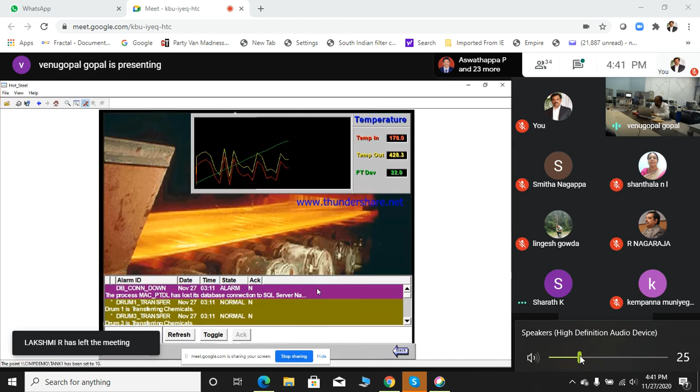Now imagine he is watching this screen. Suddenly he will get one alarm, red color: pipeline number 7 leakage. How do you know pipeline number 7 leakage? We use a very special sensor. Say this is pipeline number 6 or 7 or whatever. Suppose there is a cut here. These are all high pressure oil. The whole room will become oil within a few seconds, because such a volume of oil will be pushed out.

How do I know there is a leakage here? Because I will be measuring pressure here and here. If there is a difference in the pressure, I know that there is a leakage. So immediately, the system will put an alarm here, saying that there is a leakage. Line number 7, line number 6, there is a pipeline open. Now immediately somebody has to take attention.

What will this fellow do? He will simply go to the hydraulic screen and stop line number 7. Quickly he will stop it. So this is what we call supervisory control. The entire plant will be at his fingertips. Imagine such a huge steel plant; this one fellow will control it.

Now then what will happen? He will call somebody on wireless: maintenance people, go to this line. Then somebody will go attend. Then he will put the system back into operation. Then what is important is he will also get a plot of temperature versus pressure, whatever, all continuously going on.

That means every happening in the plant will be known to him. Now these red color alarms will not go away. They will not be erased. Nobody can erase this except the vice president or somebody very senior. Only he can erase this. Otherwise, if an operator makes a mistake and erases the alarm, then nobody will know. So this will be stored in another database called the alarm database.

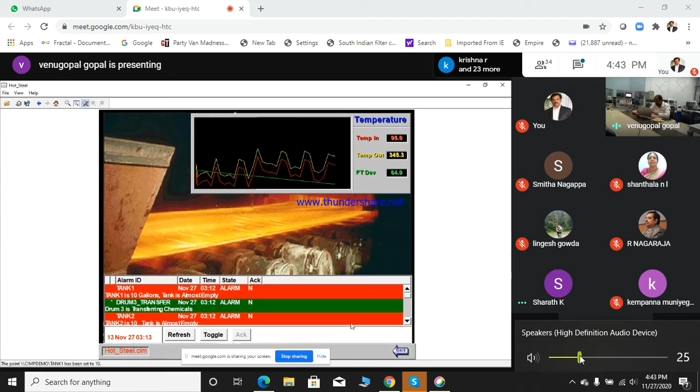So a lot of things we do, which are related to computer science, related to mechanical engineering, related to electronics, related to electrical, everything we do. Okay, so many types of things we do. Anyway, I just gave a brief idea. I have a lot of other things to show in SCADA, but let us stop here.

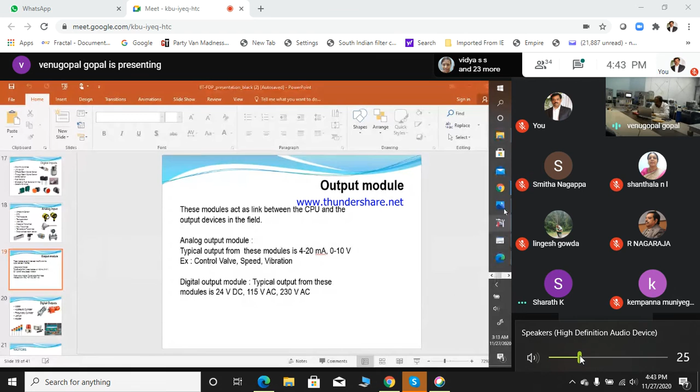Now, coming back to what is important for you. What is it that you can do in college? Can you become a consultant for these types of things? Probably not at the initial level. If it is not possible, then what is it that you can do? I will tell you some 2-3 things quickly.

See, I went to Shimoga for some personal work. I went to one college and gave a talk on automation. One boy came to me. He said, "Sir, normally the betel nut trees they grow. Climbing the betel tree is a very tricky thing, a very, very specialized profession. I am a mechanical engineer, I want to do something."

Then I gave him an idea of a scissor lift. A small scissor lift, which can take the weight of one person, maybe about 80 kgs, 100 kgs. You can design a small scissor lift to go up in a compact space. Then that boy made a very beautiful project, a very economical scissor lift. Of course, there are a lot of deficiencies in that, but it doesn't matter.

And again, Malnad College of Engineering, all of you know, I am one of the directors there, I am an advisor to the college. But how it came like that, we did a project in Hassan. Near Hassan, there is some village with a coffee curing works. Lots of coffee curing works are there near Hassan, curing coffee from Chikmagalur. We have done a lot of work for coffee curing. I don't have any videos. Anyway, they're very small, so we don't have it.

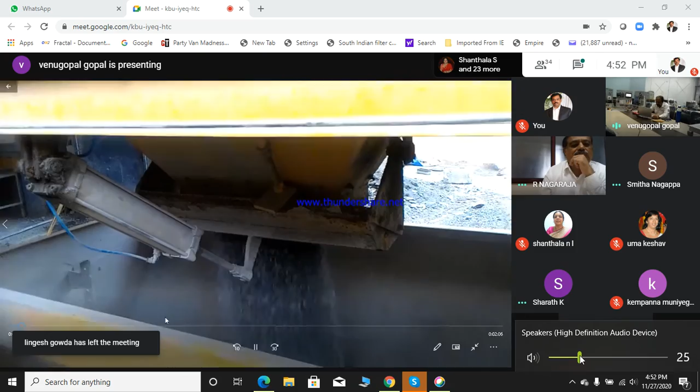What they used to do, I showed one of the students this batching plant. I showed them the concrete, this is the screw conveyor. See, one cloth got stuck here, that's why we removed the screw conveyor. Now one student did a small model of this concrete batching plant I showed you. There are bins, the pneumatic gate will open, the belt conveyor feeding it, the skip bucket going up, feeding this metal into the mixer. So they understood the concept and they did it so well.

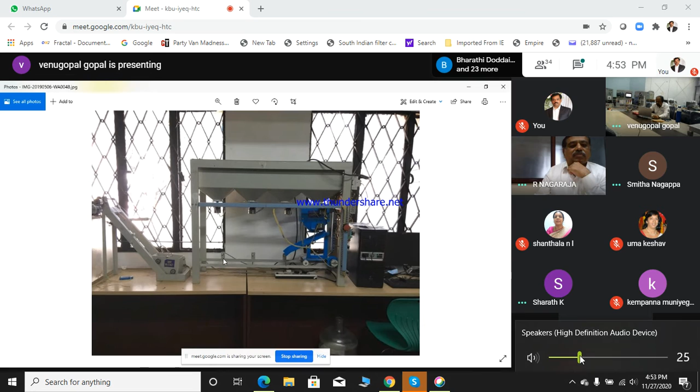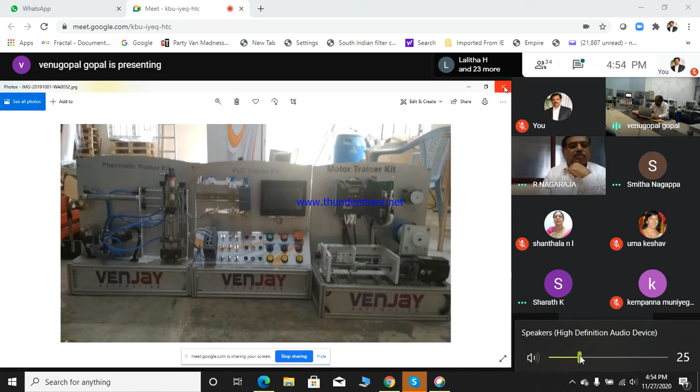So to make something like this, you don't have to invest a lot of money. What you have to do? Some basic infrastructure you have to invest, like whatever I have here. This is one PLC with HMI, one servo drive, ball screw, one induction motor. This is actually my training kit. I use this to train our own engineers, because whoever joins needs training. So we develop these types of things. Then we also made one very interesting kit for the electrical department.

So here this is the induction motor trainer. Actually, we don't manufacture these things. What we manufacture is very huge. We make very big panels, I showed you just now. So we have no intention to make these types of things. This is a kit where you understand completely about the induction motor. This is called the induction motor training kit. We made it for ourselves, with one PLC, small HMI. This is a DOL starter, star delta starter, then the VFD for control of speed.

Then there is one college, BNM. About 30 faculties came for an FDP, faculty development program, in our facility. They saw this and said, sir, we want to buy this. So we made one and gave it to them. A lot of colleges are buying these types of kits. MCE Hassan is also trying to do a lot of work, some miniature models of the zero speed switch I explained. You don't have to buy the entire stuff together. You can build your lab.

What you should do, you should have one focus, one idea: yes, I am going to build a lab of this nature, which will cost so much money. But you don't have to do everything in one shot. You can slowly build. There are some people who make education trainer kits and all that. I am dead against such things, because even in NIT Calicut I have seen they supply something and run away. In college you can afford to supply something and run away, but I cannot do that in industry. If I supply some nonsense and run away, within no time my name will get spoiled. Then I will never get an order.